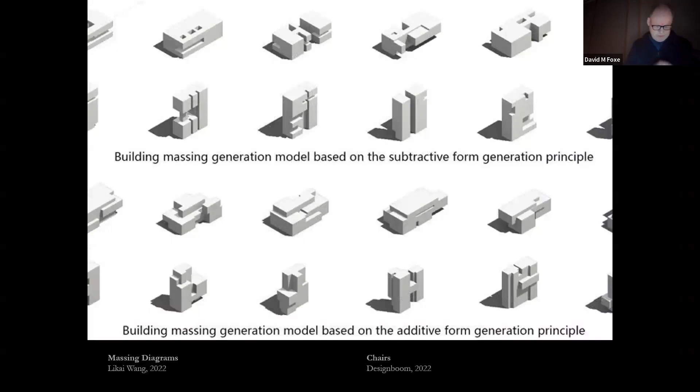What if you're asked to describe a loved one, and instead of saying something about their character, you describe the type of container that they would fit in? What if you described their dimensions, their weight, whether they broaden or taper as they go from one end to the other? This would be somewhere between insensitive and creepy. And yet this is often what we start with architectural descriptions.

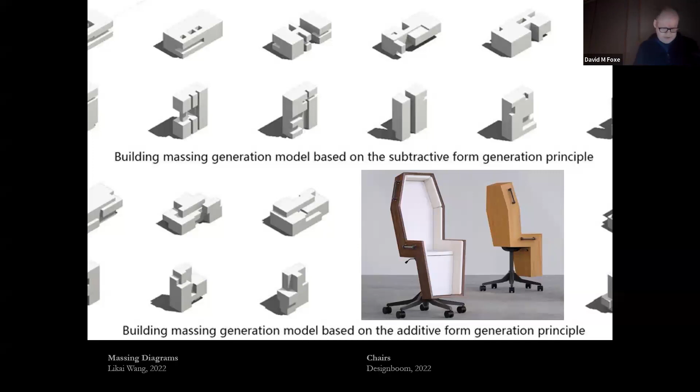We start by talking about their massing as if their massing is somehow before their form and before their material. So given that the non-architectural public seeks resonance and meaning in the experience of materials and craft, why not pursue these considerations simultaneously rather than sequentially?

So this is an approach that I am hoping to articulate today, that this would illuminate the human involvement at each step and expand the possibilities for tectonic expression, so that we can personify materials not just as being truthful or lying, but as being personified in other ways as members of a team, with all the nuances and challenges that it takes with human collaboration.

Thus, my title is Materials as Collaborators, Teams, Themes, and Trees. So let's get a little bit of default stuff out of the way.

We're going to close something. Yeah, okay.

So a little bit of default stuff to get out of the way. First of all, personification is not buildings that look like their owner. This is not about how people look like their pets. That would be a different lecture than what you're attending today.

Rather, when I talk about personification, I realize I'm indebted to a very long history of architects and historians who have written about this. In particular, Jacob Voorthuis, a Dutch professor I met in Eindhoven about 15 years ago, who has traced this history from Plato through the Enlightenment and all the more recent polemics on this.

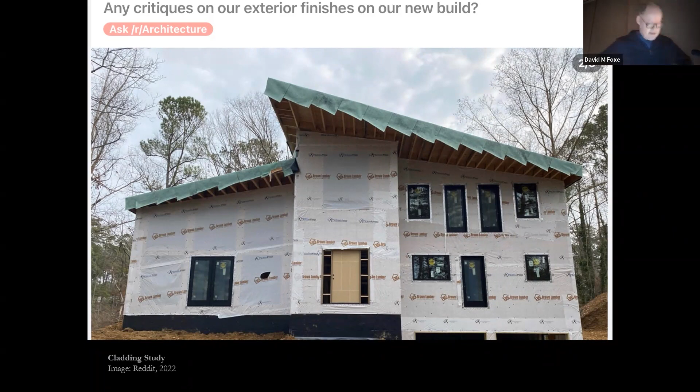It's so passive that the person waited to put it up on Reddit to get feedback before they would ask for validation and put their cladding on the house. It means they could have any combination they could ever want. You may make fun of it, but this actually happens — this is a house built down the street from me by a former architect, and it definitely happens.

So I'll pick an example I walked past. I didn't know the architect, I really didn't even know the client, but it's from a group of firms — it's a project in New York City. The participants aren't here to speak to their own projects, so I'll just say they're brought to you by the letters K and T, and they have many collaborators. It's owned by NYU, a 700,000 square foot replacement for a mid-century brick gymnasium in the center, with a bunch of performing arts and other academic uses.

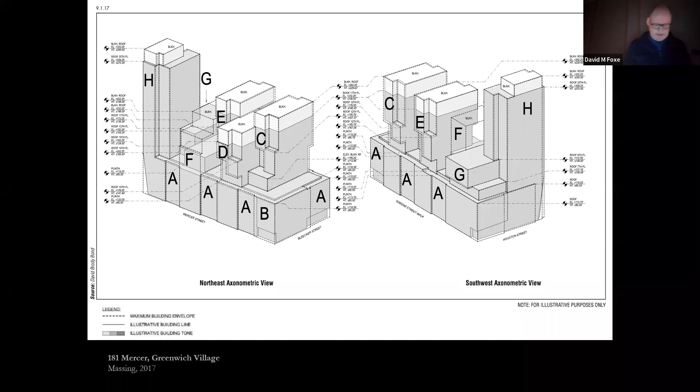Instead, what we seem to have in all sorts of parts of the industry is this curious situation where the form is driven by the massing, and the material is therefore a distinct decision.

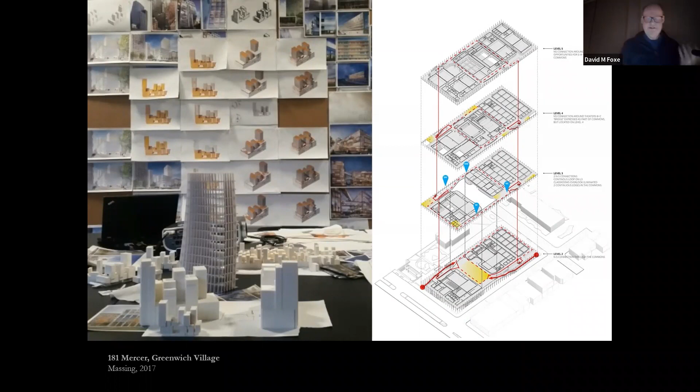Early studies of this project, not mine, but just from seeing what's elsewhere in the industry, show that there were clearly many ranges of cladding considered. But in the end, the sheer complexity of all the different things that had to stack, all the different things that had to transfer, and just the whole range of things meant that essentially the overlying thing became glassy.

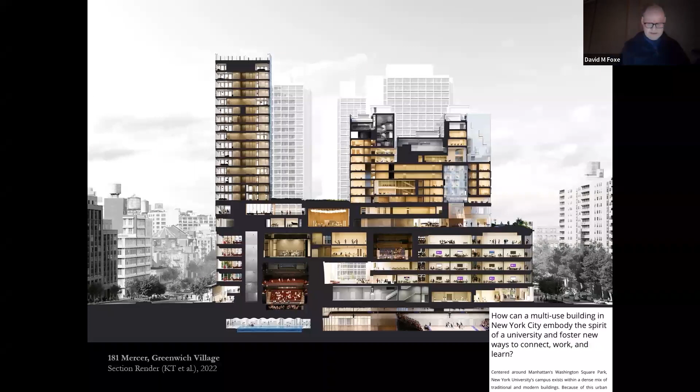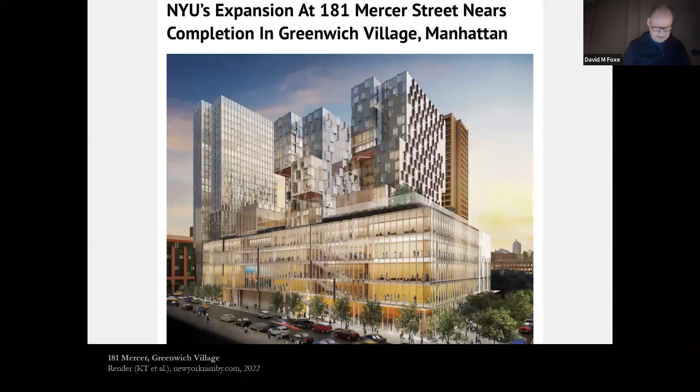The aim was to be fostering connection, as it says in the lower right. This aim was meant to be welcoming and hospitable. And these personified qualities became equated with transparency. They look one way in a render. They look a little different in real life. I don't really have an opinion about this.

I know that this has some of the best team members and some of the best and most innovative glazing procurement in the world. And it costs about $1 billion, but it's relying very strongly on one team member, the curtain waller. So I would ask if we could find other ways to achieve the personification of qualities beyond openness and welcoming, beyond the curtain wall, beyond the insulated glazing unit, if only to have a wider range of tools in case our clients are assuming the default of steel framing or of curtain wall or of other things.

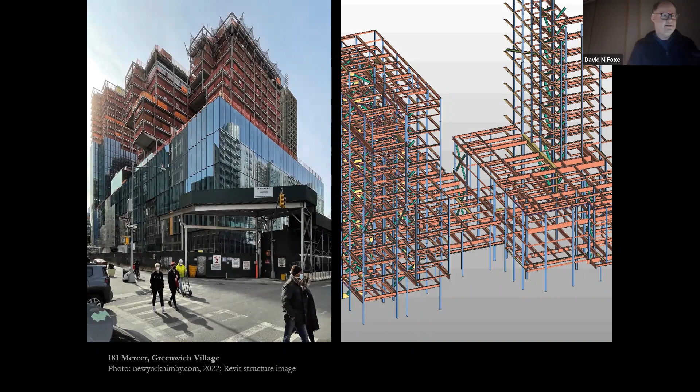So what if instead of looking at the default results and the default models and the default beams on our screen, we looked at the materials and the teams involved? In this, I am highly inspired by someone named Lillian Marlin and her construction photographs, which capture many of the pieces that are on this. It's part of why I picked this project. I could find things like this.

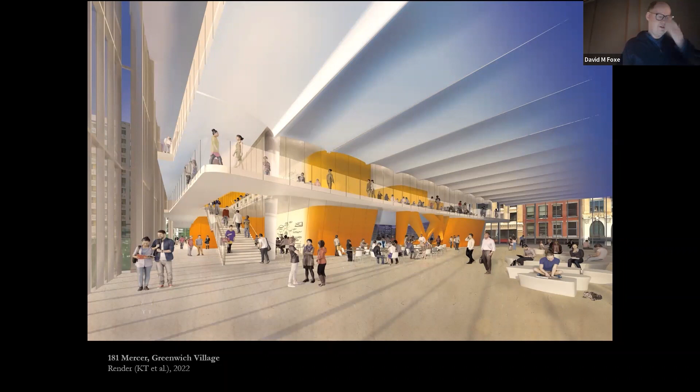And so what if instead of an interior expression that again was entirely separate from the structure, from the enclosure, what if there was something where that teamwork, the value of all that human work, were to be apparent in the end? And by teamwork, I don't just mean the big giant names that we occasionally see on things.

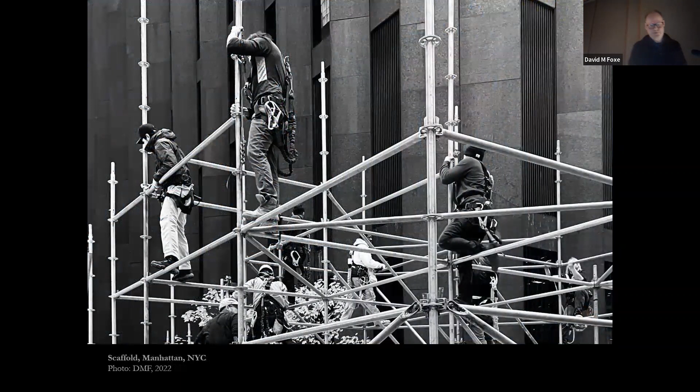So for the rest of this, I'm going to talk about the human team, and I will use my photos from the past few years, many from projects here in Massachusetts.

So first, every material can point towards a strategy. I don't mean a material strategy, I mean a thematic strategy, a strategy for unifying all the different parts of a project. This is a welcome center.

It is a restroom and welcome booth in Salisbury, Massachusetts. It's near the mouth of the Merrimack River and the border of New Hampshire. The goal was to have it mark that you were at the beach, even though the water was not visible until you got past the fried dough. And so this is a way of dealing with a challenging context. This is my first project that is across the street from a strip club.

So the challenge here is storms. This is right near the coast, and the challenge is not new. The storms are even among the earliest things that they chose to make postcards of in advertising the benefits of making the long trip to Salisbury, Massachusetts.

And so I would argue that storms and wind loads are not new, but our response to them is. We have now gotten much more comfortable with the idea of elevating structures based on code and climate risk. But even after you decide, oh, it will be elevated, it will have no fossil fuels, it will be naturally ventilated, it will have accessible restrooms throughout the year, it will have flexibility, even if you answer all of those questions, it doesn't tell you what form you need.

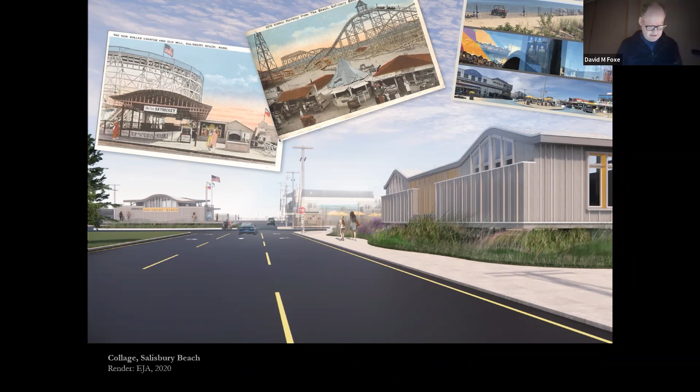So we looked at, among other things, the now demolished recreational things that had been there 100 years ago. And we also understood that building in a marine climate with salt and sand and all those challenges is a real clarifying experience. So in this setting, exposed steel would have all sorts of challenges. It must be marine grade, and doing that at the scale of the full building is really cost prohibitive. Likewise, exposed concrete is going to be very vulnerable, particularly if there's water or ice accumulating on it.

And light wood has all sorts of vulnerabilities too, but thicker timber and laminated wood has a stronger track record. It's been used for many decades in older park structures. So we took up the possibilities of a team led by trees, even with all the challenges of a natural material.

This is southern yellow pine. It's a wood that's readily farmed, able to be treated and laminated, and it can be curved while it's being glued. We'll come to that in a moment. And as part of this, we recognize the material can inform the form and made the curves gradually change to reconcile different site conditions and to help reconcile where parts would be solid or trellised or other things.

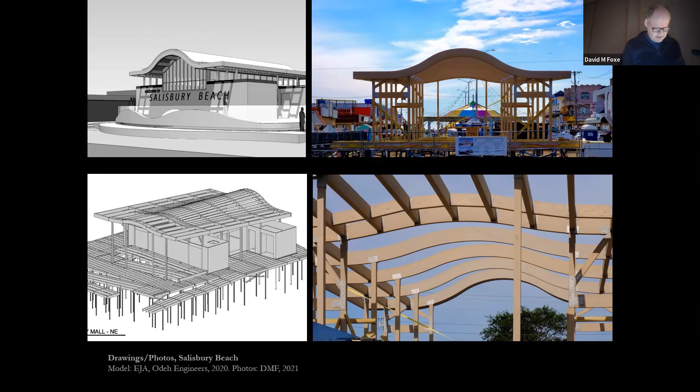This meant that multiple bidders could curve the wood if it was well defined, and therefore it could be suitable for public bid. So we took this a step further and said, well, for each particular material, can it bend and can it twist? A question we might ask of our team members.

Concrete and steel, they had already left the building. So they're going to do the foundation. That was about it. But if you ask plywood, it's willing to say yes, especially if it's willing to show up in thinner layers. The layering could form agreement with the structural needs and make the entire curved plane a rigid diaphragm. Rigid insulation gets pretty nervous about bending, but spray foam is willing to participate, especially if it's willing to agree that the beams and the wood are non-conductive. Spray foam gets to be a pretty good team member in that regard.

And finally, roofing, which is a material that we rarely consider early in a project, but I think it's important here. And it too, again, with some gentle coaxing, was willing to do a little bit of twisting.

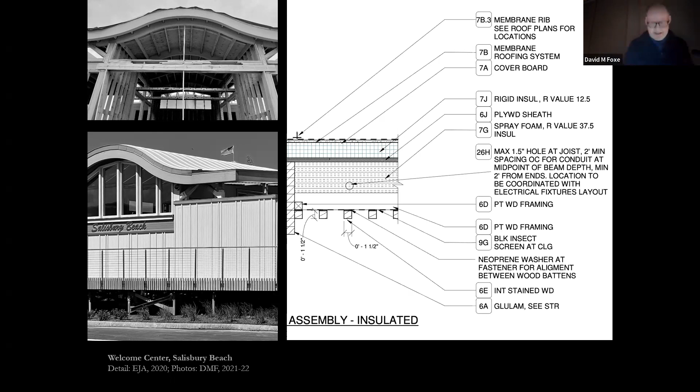Now, many team members were not willing to twist. The rot-resistant wood that was being used in the trellis, not going to twist. Light fixtures, really difficult to twist. So many things were going to be segmented, and that's not their fault. That's just what they were. And what's interesting is that this meant that all of the special geometry would be occurring within a factory, not something that had to be resolved on site. So it gave some clarity.

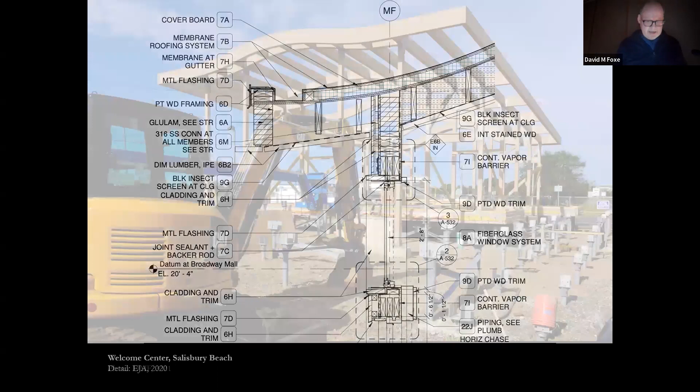Now, literally every other aspect of this project changed one or multiple times during design, bidding, and construction. Anyone do public work in the room? Okay.

The foundation changed. The foundation pattern changed. The deck height changed. The ramps changed. The stair changed. The operational approach to insulation changed. The length of the overhang changed. Someone had an opinion about the shape of the overhang. The accent colors changed. The focal point involving flags changed.

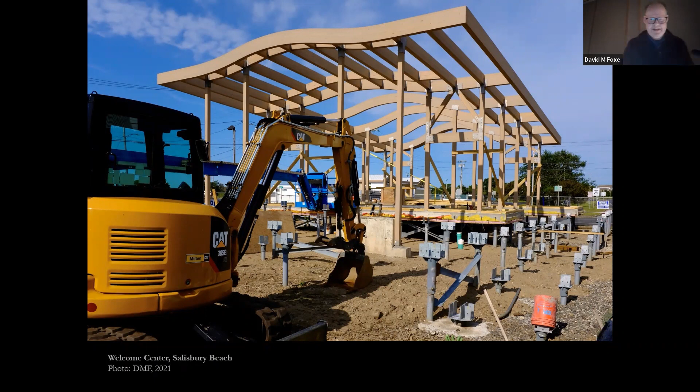These materials can become assemblies that even with all their limitations means that they can be used systematically. Not as a science project, but in pursuit of the experience that can end up resulting.

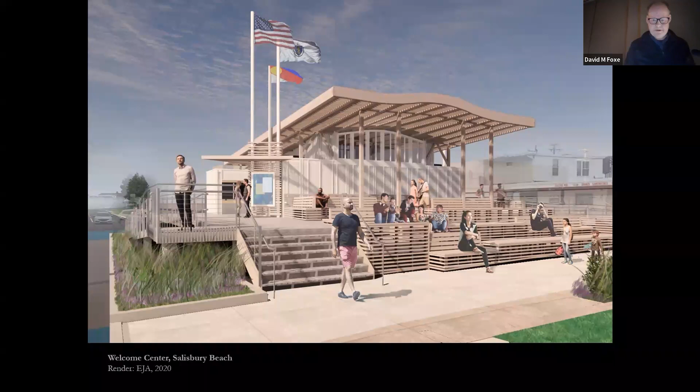Now, the value of this to people is not in all the technical things that I'm talking about. No one looked up to this and said, wow, look at that form embedded in a material choice. All they see in it is that this is something that connotes care. It means that people looking around are able to say, wow, can you believe they did that for us here? In other words, not for a more wealthy destination, not for a fancy place, but for a place that has a wide range of people coming to it.

And this had all the challenges of a public project, but in the end, the overall gesture feels like it does welcome people to the beach. And so I will say that it's okay.

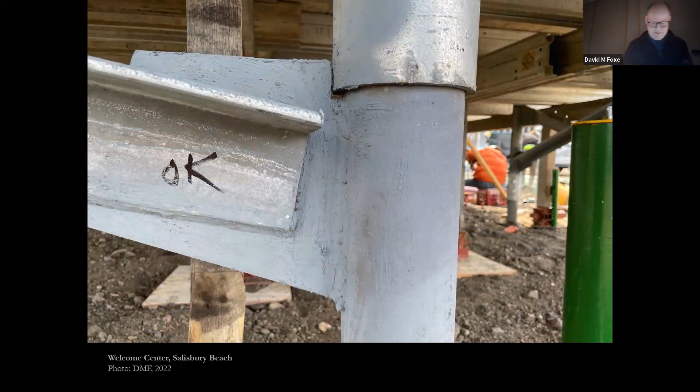Second, every material implies a team, and it brings with it the assumptions about teamwork. So as we did before, let's go up a scale.

This is the Groton Hill Music Center. It's about 125,000 square feet of building on agricultural land. It serves as a community music nonprofit and it was built with a single donor. It has halls for 300 and 1,000 people, plus practice teaching and support facilities. I believe it is the largest mass timber performing arts facility in the region. It opened last fall, and its first full concert is this weekend. So you guys are probably among the first people seeing it in this state.

Even with all the wood dominating, it's important to recognize that it's a hybrid with uses of concrete, steel, and timber, all serving roles that are architectural, structural, and acoustic in nature. The key design approach is one that unifies the wood for structure, acoustics, and finish.

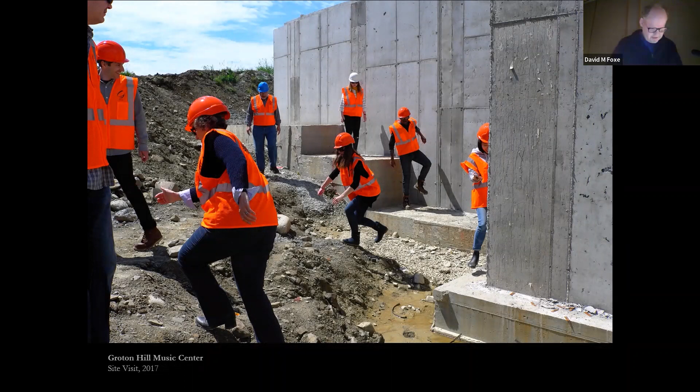After 7 years and 261 site visits, there are many stories I could tell about this, but the ones we're going to focus on today are about how materials imply an approach to teamwork that goes beyond the typical office site visit. They include asking who is going to make something and where, who is going to transport it and how, who needs to be present, and what do all these other people assume and why.

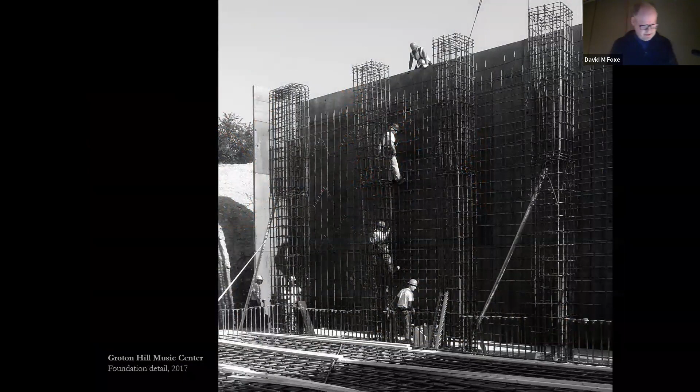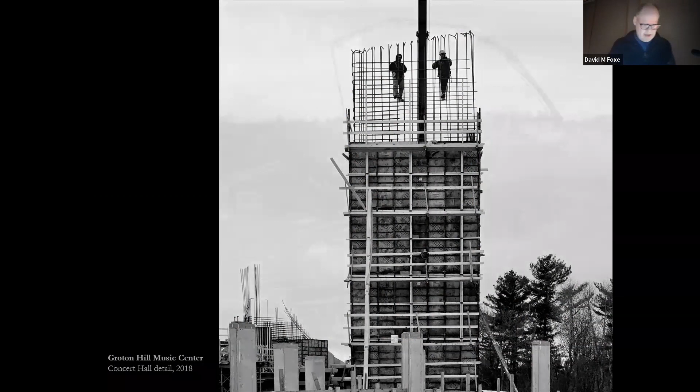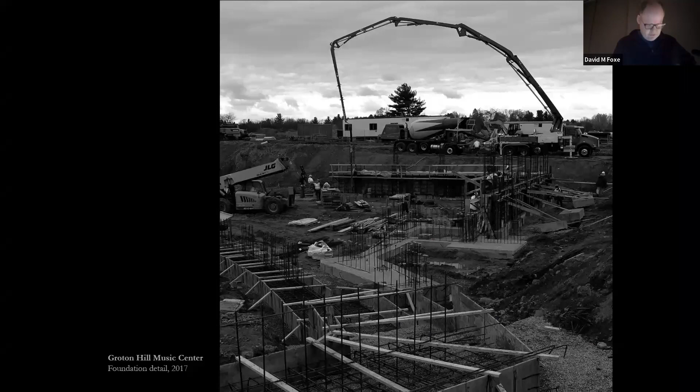If you use concrete, someone has to get the rebar and formwork into place from ground level down low, going down 20, 30 feet, or high, going up a distance that I was grateful to stay on the ground from. It's a material that takes weeks or even months, but it's also the material of minutes. It's all about the quality of the pour, the weather, the team members, as good or as bad as the batch or the crew that arrives.

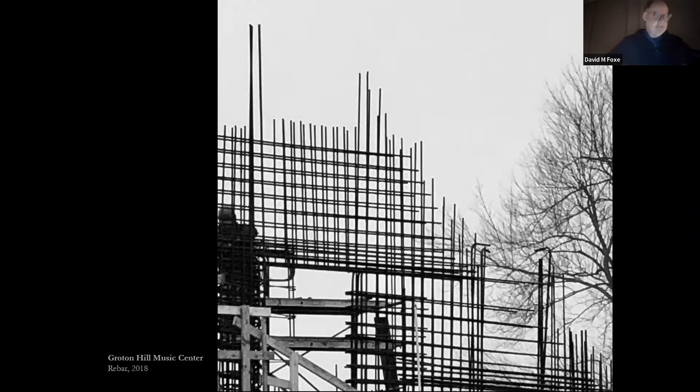It's the first trade, the first material to occupy space permanently. Its ability to take on the form in any space is a freedom unlike steel and timber and things that arrive with great precision.

For this kind of project, where we could not be allowed as designers to ask the concrete to be crafted in a way that it would be exposed, it was the team member of mass. It was not only there for compressive foundations, but to act in bending for box beams, for lateral systems, and to be the mass around the acoustic spaces.

Now, if you use steel, someone can arrive with trucks and cranes and make all sorts of progress even before their morning break. Steel initially seems like a material that's far quicker, but all of that speed assumes that it can be hidden by acres of acoustic ceiling tile, that it can be sprayed with fireproofing, that it can be left out of sight, even if it is just above the frozen foods aisle or above some other typical space.

So for this role in this project, steel had the background role to support light metal framing of interior volumes, but also to be paired with wood, to be truss members where steel could be more optimized in tension.

Now, if you use wood, it is the natural material that we are spoiled with in North America. It is so readily available in its lightest form. It can be speedy, it can be readily adaptable, but it reaches limitations at scale. So it is in its larger heavy timber or mass timber applications that it has the strength and resistance, and yet it requires more careful thought.

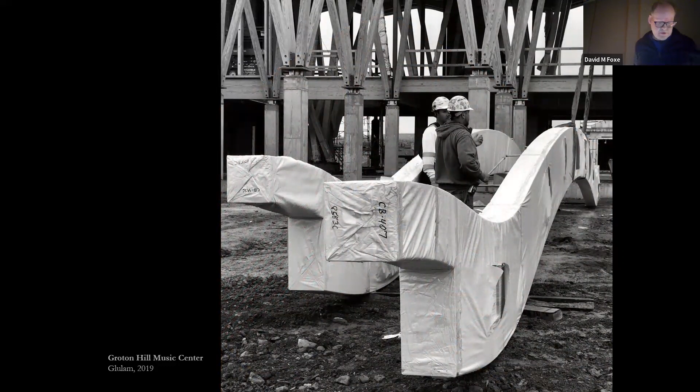This is a sequence that shows a group of these beams being lifted into place, and I'd like to tell you a little about the approach. There are 3 large halls. They each have a different span, and a different shape governed by their acoustic requirements. They each use glulam tuning forks.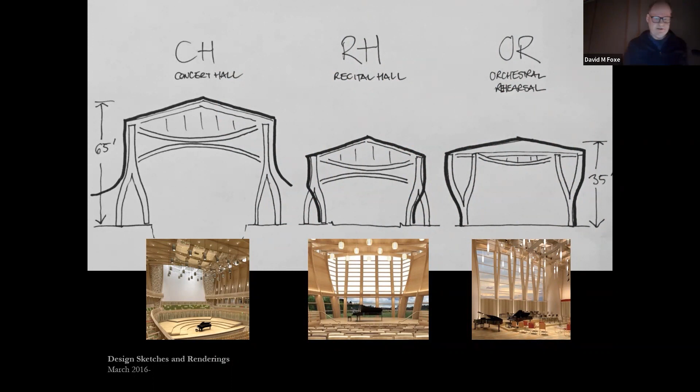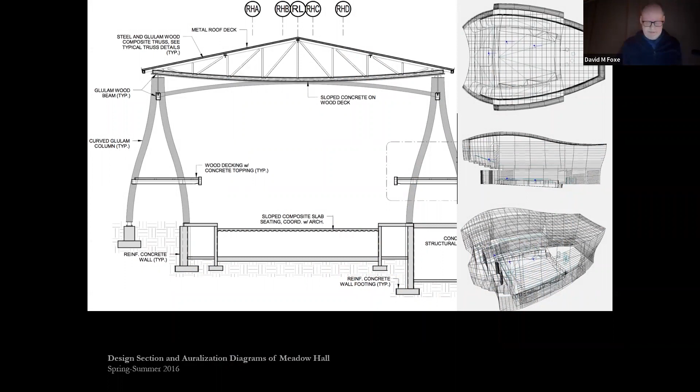They are not wishbones. Wishbones break. Tuning forks do not break. The shapes and curvature were governed by acoustic diffusion patterns and where sound would be reflected, and from that there was a system of these tuning forks that would march along.

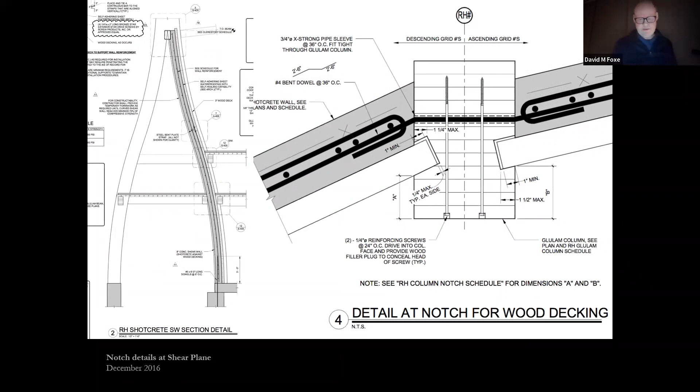Each wall would then be formed with decking set in notches into the columns, and concrete, the dark gray stuff, being attached behind it. So the way that you start with this is that you have glulam in a factory.

It's finger jointed, each piece. It's very ordinary wood. It's laid up with really messy glue that all squeezes out, and it's bolted and clamped and everything on a big flat floor.

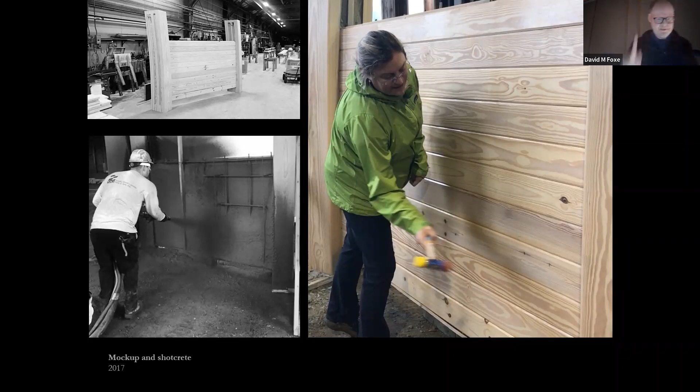Once the one mock-up that we got was made, it was then shot with shotcrete, and the acoustician checked it for solidity. And so when it comes out onto the site, these things plant their feet in the ground.

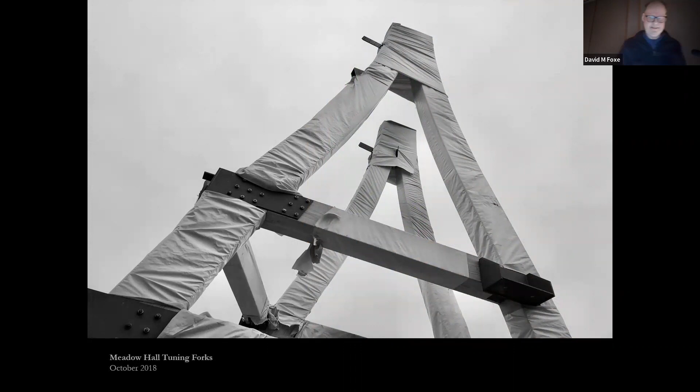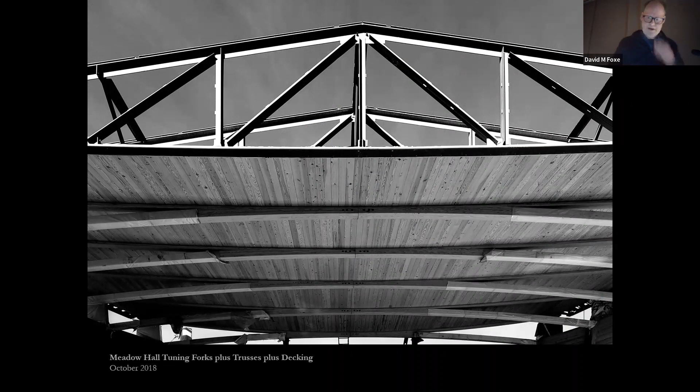They're very stable when you spread your legs like that, and therefore they could be erected in pairs. As each one would go up, it would get its steel truss, and then the decking would connect. Just as with the prior example, all the geometry would have been done in a factory, hopefully, and then it would be brought and erected.

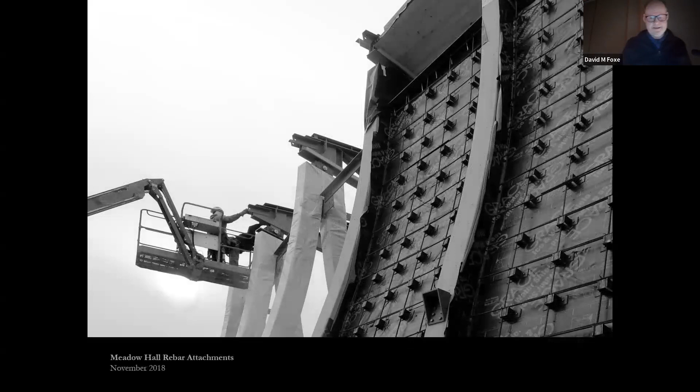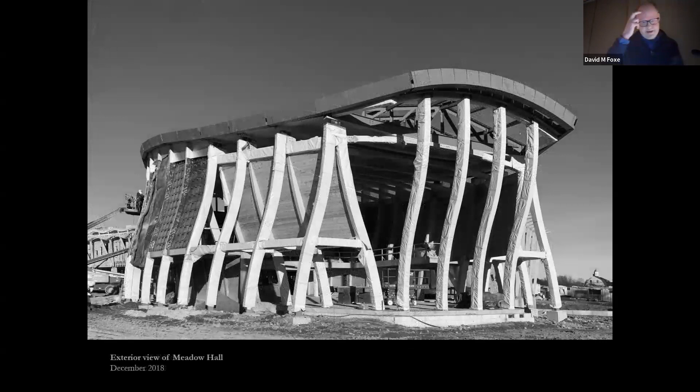This also meant that the rebar attachments and everything could follow in sequence for the concrete, lots of rebar. And so then you'd have the skeleton of a form that had been derived from the inside out, and then had concrete going onto each bay.

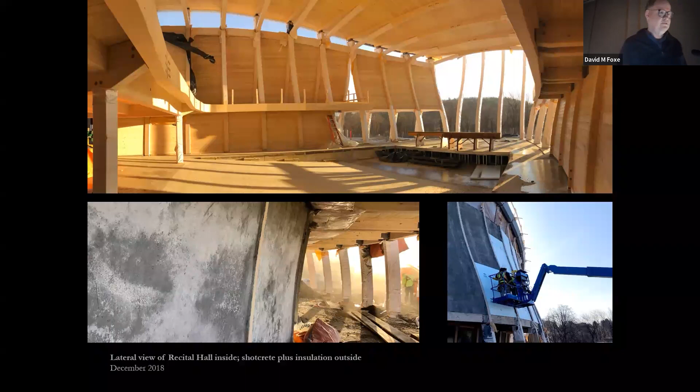So what you have is lost formwork that gets abandoned in place, essentially, and then insulation and other things wrap the outside. Metal diamond tile clads the surface of the insulation, and you have sunset, and you have a recital hall. It's a little more complicated than that, but that's the basic story.

And so by the time we get to the acoustic testing of it, you can see that there's a lot of teamwork of materials going on here. This literally close teamwork of materials, right? The wood not having enough mass, the concrete being there for mass and for shear planes, and all of this being connected together.

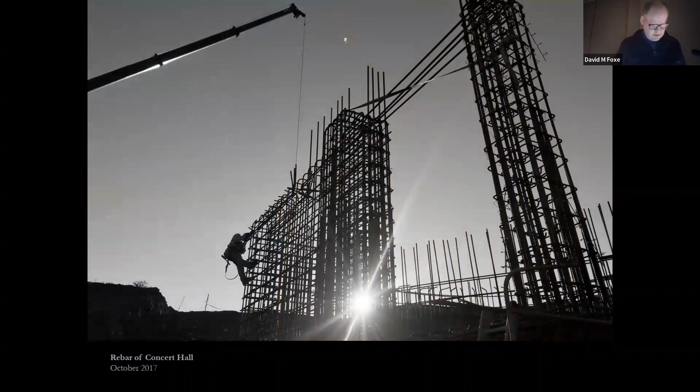It is often difficult. It requires people to interact. It requires people to go away and come back. It requires trades to do things that they would not have the assumptions of doing. This is something that many people will find challenging. Some people will find it builds pride.

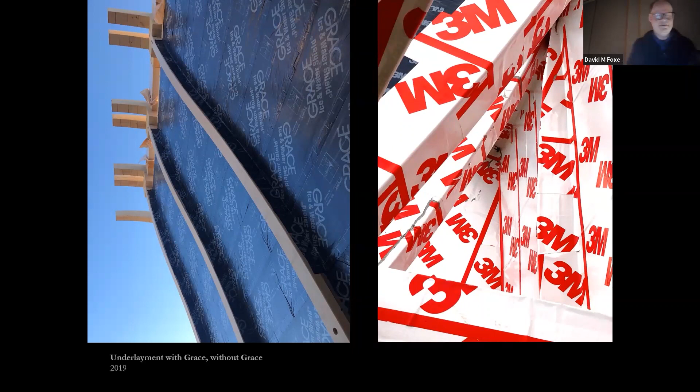You can help to answer the why and the what. There's another reason to understand this that could be its own lecture in itself, which is that each material has its own ecology. In this regard, I'm indebted to Kiel Moe and to Michael Sorkin and countless other people who have pointed out how much material extraction is required of the products we rely on, the aluminums, the composites, the plastics, even glass. It's through these materials that require substantial energy that we get to see that each material implies a team, and that the team's ecological footprint may span many, many continents.

So why not have fewer materials that you can understand better and have a stronger relationship with? So in this regard, every material can multitask. Every material can collaborate, but only if you make it inevitable. It can't be optional.

This multitasking tells us about their personality. It also may tell you about your personality, but that's another question entirely. Every material can be part of your daylighting solution if you shape them with that in mind, but it must be there from the start. No one will be willing to change your structure because you want light to just—

But if you are willing to shape with these things in mind and to build into it the idea of where there are openings, these can all be a part of the way that it participates in natural light. All materials can be part of your thermal comfort if you consider their conductivity and how they provide pathways for air. All the concrete that you're not seeing here is providing plenums underneath the performers, plenums underneath the audience. The gaps that you're not seeing between the ceiling and the windows are providing the return air pathways. The wood curtain wall is providing a different expression that I would argue is both literally less conductive and warmer in its appearance than an aluminum curtain wall.

If you just consider what it will be like for light to wash across. In fact, all of these materials can communicate care or effort or other intangible qualities and tell you something about the people who cared enough to make them happen, not just to design them, but to lug them into place, to make sure that they got there, all the other activities that I, as a non-contractor, would not even begin to understand.

The mechanism is that every material that you're personifying brings its own connotations. It brings it through meaning. Materials have baggage just like your other team members, just like people. When you choose to place a material like metal shingles in an agrarian context, you bring with it all of the baggage, all of the comparable conditions that resonate, even if they're being applied to new forms. It resonates with where you've experienced something like that before on a barn or on a silo.

While we're on shingles, there's a reason that the shingle style — Vincent Scully moment, look him up if you don't know him — was not just about cladding. It was about the forms and compositions of asymmetry. It connected the material expression and the massing, and I'd argue this allowed for fluency, where the material could be used fluently around shapes and surfaces, flat and curved and otherwise, showing an understanding of the limitations and possibilities.

This is why there will never be a vinyl siding school of architectural history. It was a cladding independent of massing.

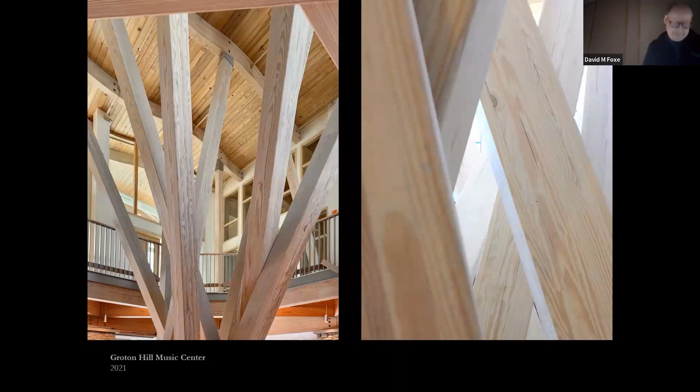With wood, when you apply this to new forms, you open up this whole realm of connotational possibility, for good or for evil. Is it like inhabiting a tree, or like inhabiting a forest? Is it like being on a ship? Is it like being inside a piece of furniture? Is it like being inside a musical instrument?

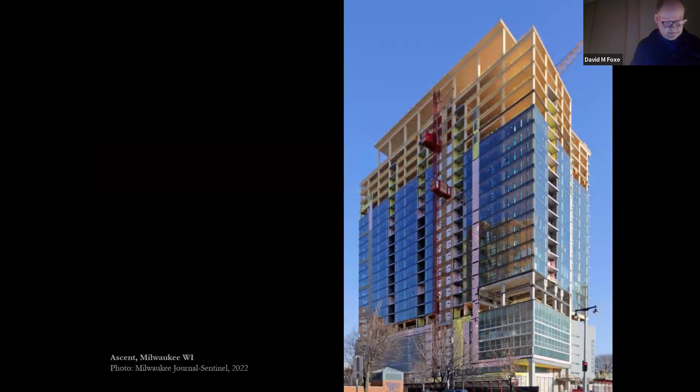This is my fear with the so-called mass timber skyscrapers, of which I have not designed any. These are made of cross-laminated products like CLT and NLT and DLT and other forms, that in their hurry to claim their heights end up covering it in curtain wall, concealing their greatest strength. This isn't true of all of them, but it's true of some.

As we know from daily experience, glass is generally dark or reflective. Even low iron glass is not a local commodity with regional terroir. It's not something that bears patina. If you want something with glass to age or weather beautifully, it's going to need a handle, something attached to it. It does not show the imprint of those who made the curtain wall — it shows the handprint of those who clean the curtain wall.

So if glass and its expression is truly essential — and since I brought this up at the beginning of the lecture, I can't completely abandon it — then perhaps use its non-transparency as a feature. Make the faceting subtle, in a way that shows its qualities of light.

This was, to some extent, our approach for the glazing at Groton Hill. By faceting, leading from the acoustic qualities, we got this slightly differentiated expression. One might even say this faceting could be considered jewel-like, but I'll leave jewel and softy projects for a future time.

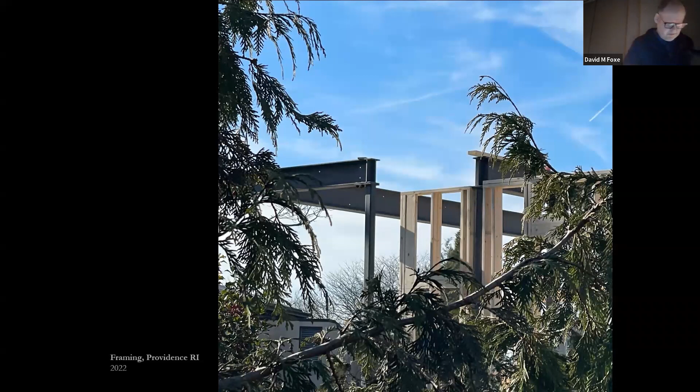So to wrap this up: in the garden of material possibilities, we have become seduced by the ever-present temptation of steel. We've gotten used to the idea of structure clad in unrelated materials. We might even say we elevate it on a pedestal as a default.

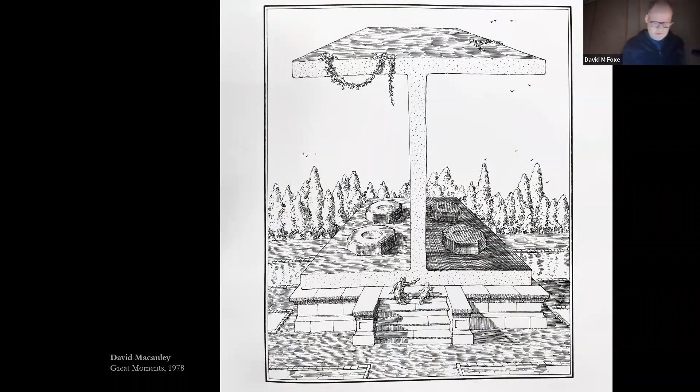This is from David Macaulay. We have even used it when the context tells us of so many other materials, because we've arrived at massing and cladding separately. There's nothing wrong with an atectonic approach — it is not immoral, you are not bad, but it is only one option.

And steel can be such a good team member with other materials as well. Among the most enthusiastic team members for the wood was the person providing the steel in this project.

If you consider the teamwork of materials, you run the risk of many conversations with contractors throughout the project. It will not be something that happens automatically. You will be a busy person.

But if you do not consider the teamwork of materials, the concern is that this places the architecture inside the aesthetic realm — the aesthetic preferences of the moment rather than larger strategic goals. If we want architecture to embody and personify the most lasting of our institutions, if we want it to have the dependability of the things we trust and want to last, like CVS, if we want places to really have substance, they're going to need more than a column cover and a sky of suspended ceiling tile.

As an architect, you have many limitations. Many decisions are in the realm of other people. Many things rest on the client. One of your few remaining roles is suggesting materials that will get placed at human level and overhead. You can't even require them — you're just suggesting them.

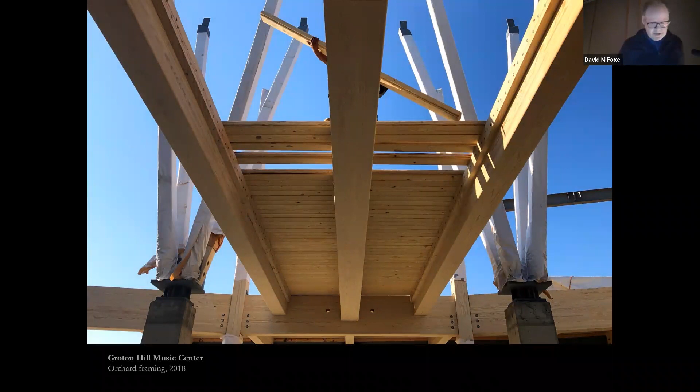The materials at the height of the hand or the head are where we look the building in the eye. They aspire to be a firm handshake. They are the personification of a greeting.

Materials overhead are where we see potential. It's where we wonder about the long arc of aspirations. They're not for getting lost in the details. They're for looking up at a constellation of ideas.

Both close at hand and far away, trees are not just good team members because they grow, but because their growth shows time and all of its imperfections. And we have grown to understand the imperfections taken together to form a quality. We call it grain, and we discuss it as an expression of something that has value.

Some of you know that I worked with building science educator Edward Allen on his last book for structures, published in 2009, called Form and Forces. Some of you in this room may have even had to use the book at various times here. This building in Groton happens to be the only one that involves people from both his cohorts of teaching—me from the last generation that he mentored at MIT in the 2000s, and my principal, Alan Joslin, from Ed's first generation of teaching at MIT decades earlier.

This building in Groton was also the last one that Ed was able to see in person briefly when it was under construction in 2019, before he passed away from Parkinson's in 2020. Ed's teaching here at the BAC is one of the many threads in the educational fabric of this institution.

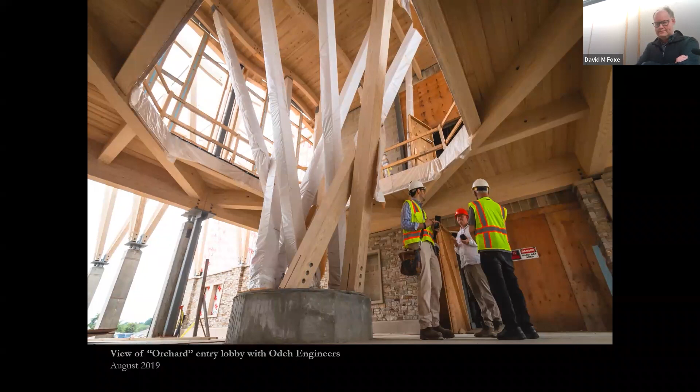It's great. Mike, another question. So as we're sitting here, considering just looking at timber designs, you realize a lot of those designs where wood is the structure are kind of predicated by a sustainability rating system, like WELL or LEED certified, and that pushes the design element. During the construction of those buildings that you presented, at any point was it 'we are doing this because of LEED, we're doing this because of this,' or was it really 'here's the design, here's the outcome'?

The question is about LEED, WELL, and third-party rating systems. There were no LEED, WELL, or third-party rating systems in any of the work that I shared today. I will save comments about LEED, WELL, and third-party rating systems for when I'm not on a microphone.

Question, which is a very good one and a dicey one: were there places where we had to compromise, where the wood in its appearance was somehow something that we struggled with, or it had to be replaced by something else? There's a lot of wood on this project that was non-structural and non-everything, like it was millwork. So a lot of the wood you're seeing throughout it was definitely not the structural wood, but was millwork or was other construction, like all the railings, all the this, that, and the other thing.